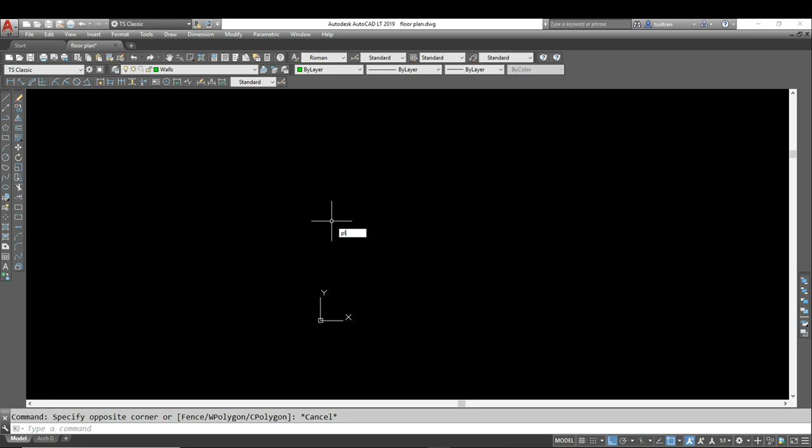Okay, so let's start drawing our walls. What I'm going to do is type PL for polyline. I'm going to select anywhere on the screen and we're going to go 50 feet and down 24 feet, come back 50 feet, and type C for close.

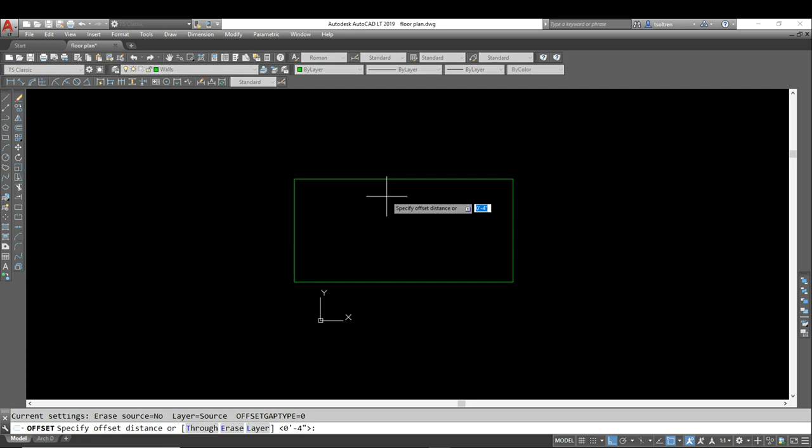Now I'm going to offset 4 inches and offset inside, and then offset again at 5 inches for our brick ledge. So there we have our 5-inch offset.

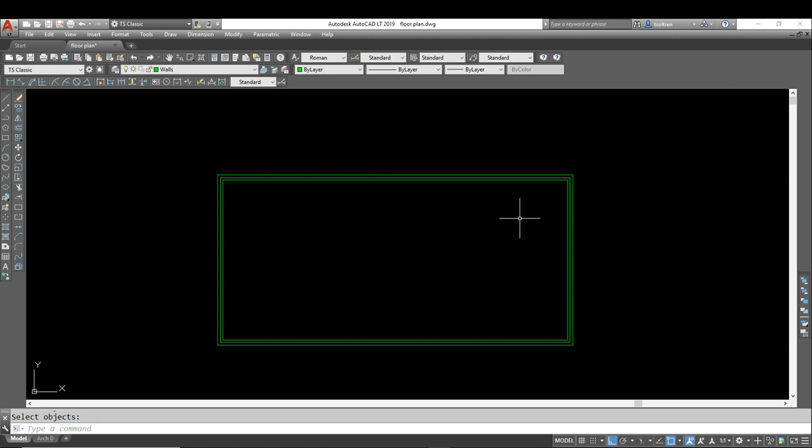And now I'm going to explode the interior line I did here so I can use that to offset my interior walls. So now I'm going to start offsetting my walls, and I'm going to type 14 feet, enter.

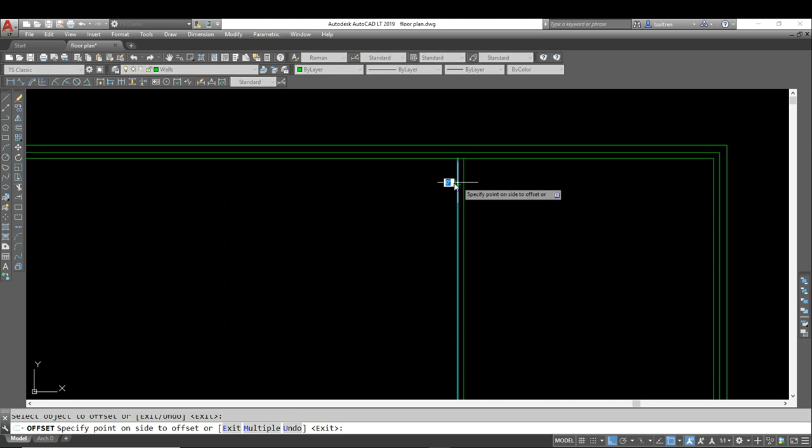And offset 4 inches. Oops, let's try that again. 14 feet. Now I'm going to offset 4 inches. And let's offset this one 5 feet 8 inches. Let's go again, offset 4 inches.

And this one we're going to offset, let's say 4 feet. And let's go 4 inches. Okay, now let's offset again over here on this side. I'm going to offset this 12 feet, offset again 4 inches.

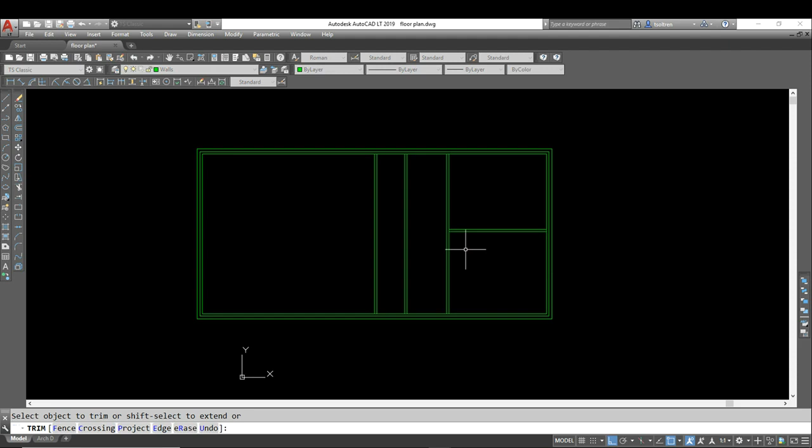And I'm going to use the trim command now, and start trimming that. So these are going to be our 2 bedrooms, and I may slightly adjust that in a minute.

Just trying to get started here, and let's offset this wall 4 inches. Actually, before I do that, let's extend this wall here. I hit EX for extend, selected this wall, right click, and I'm going to select those 2 to extend it over there.

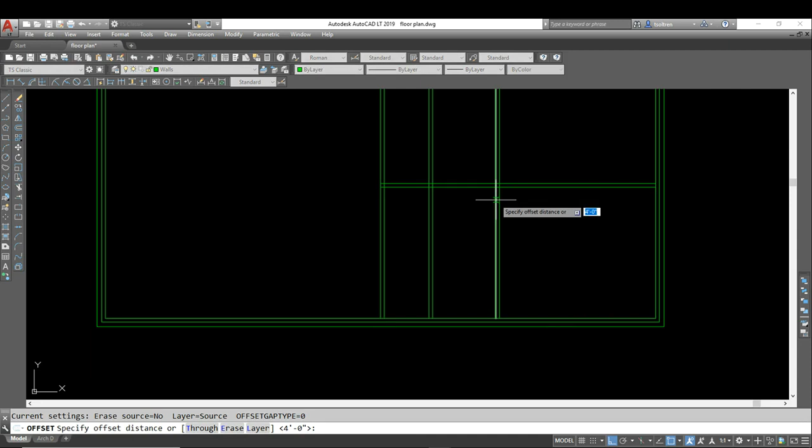And I'm going to offset for a hallway 3 feet 6 inches over here, and let's hit offset 4 inches. And now let's trim some of this out.

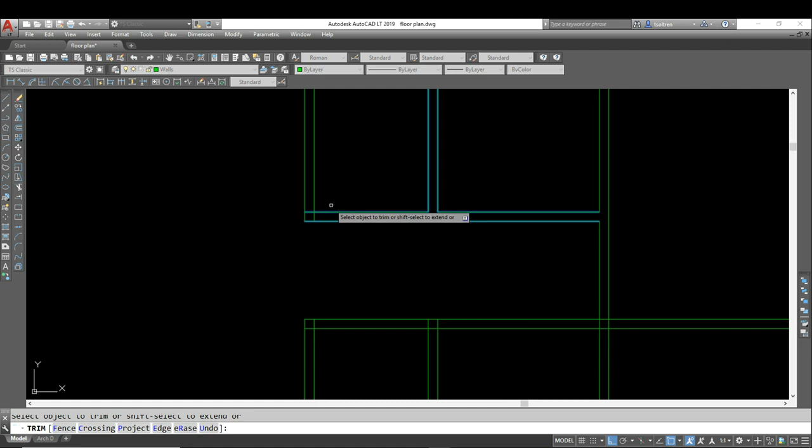Okay, and let's clean it up a little bit more. I may adjust this a little bit more in the future, but let's keep moving forward.

And I'm going to go ahead and offset this 3 feet 6 over here. Oops, sorry about that.

Actually, let's see, what I want to do is create a closet here, so we're going to go 6 feet off this wall. Let's go offset 4 inches.

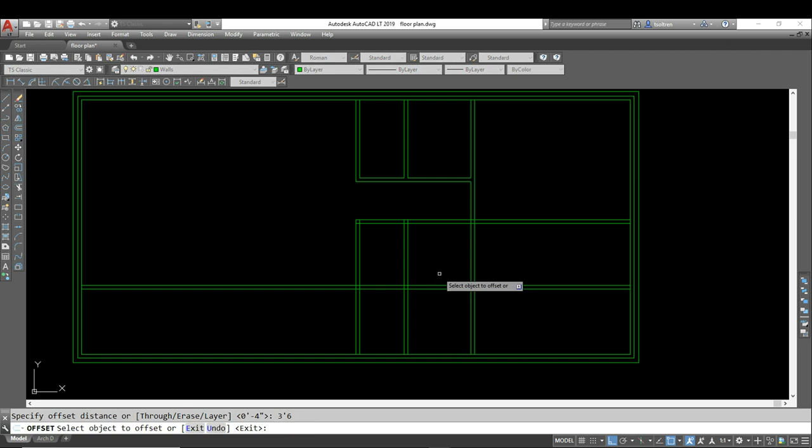Actually I don't want this to be this wide, so let's go 3 feet 6 here, and I'm going to get rid of these. Offset 4 inches, offset 5 feet, because this is going to be a bath area, and let's offset 4 inches again.

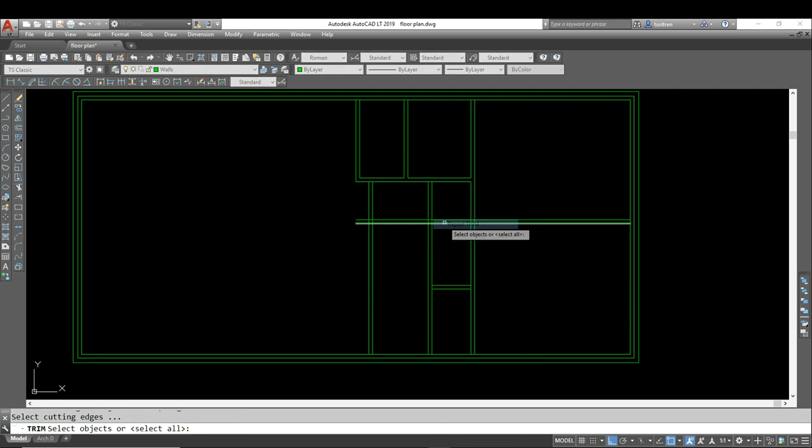Okay, so now I'm going to trim this out there, and let's trim that, and we will trim this as well, and let's go ahead and clean this up.

And I'm actually going to use the fillet command. So fillet, type R for radius, we'll keep it at 0. And what I can do then is just select these 2 lines, hit enter to enter that command again. And there we go. Now I'm going to hit E for erase, extend.

Okay, so what I want to do here is create a doorway for my bathroom. So I'm going to draw a line, offset 4 inches, and for my doors, for standard purposes, I'm just going to do all my doors at 2 feet 8.

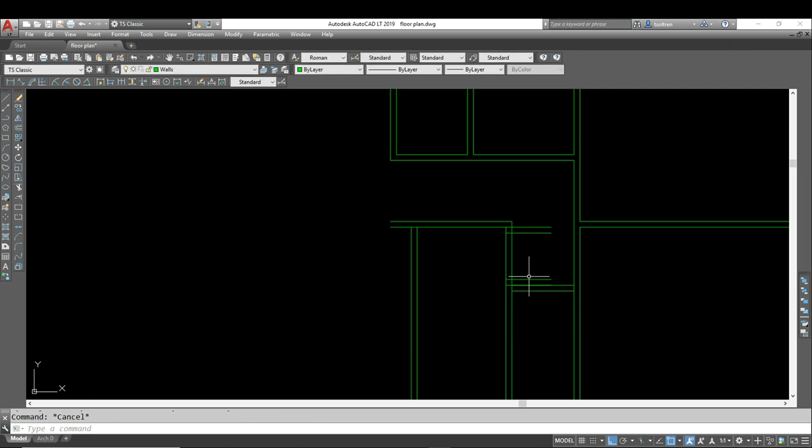And going to offset that, and do an offset at 4 inches again, and I'm going to go ahead and move these 2 walls to that point there, and then create some trim, use the trim command there, and let's extend this to the other side as well.

EX, and this will be the door for my room over here. And let's go ahead and clean those up.

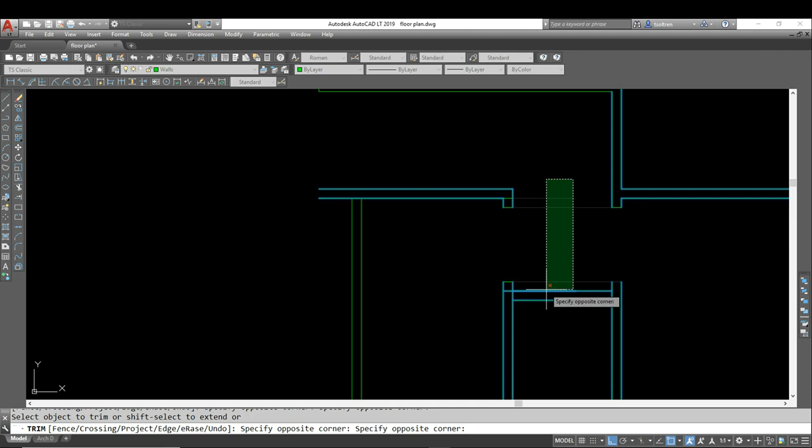Go ahead and erase that, and let's draw that line back. There we go.

Okay, I'm going to draw a line here, and this is going to be the area for my kitchen.

So I'm going to offset 2 feet, which is the standard depth for cabinets, and I'm going to extend my wall out to that point. And I'm going to go ahead and make this line up with that. So I'm going to use the stretch command.

I'm going to select these walls, and there we go, let's erase that. So this is going to start developing into our kitchen. This will be our bath, this will be our closet for this bedroom, and here we have a closet for this bedroom.

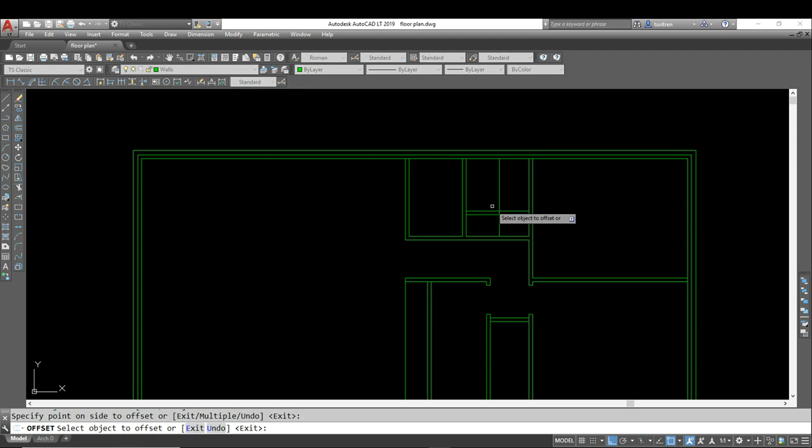I'm also going to create a closet for the hall, which is offset 3 feet, and we'll come back in 2 feet, and I'm going to offset 4 inches. It's going to encroach a little bit into the closet, but that's okay, since it's a pretty big closet anyway.

So this will be a closet, this is a closet for the hallway, and we have a doorway for our bedroom. And this is also going to be a door. What I'm going to do to center that door is just draw a line here.

And I'm going to draw a line there, and we're going to offset 1 foot 4 in each direction, so that will equal 2 feet 8. Oops, and I want to extend. Oh, see if I could do that. There we go, okay, trim. And let's erase that, okay.

All right, so let's continue on to lay out our kitchen. Here I'm going to do a refrigerator, oven, and the sink, so it's kind of going to be a U-shaped kitchen.

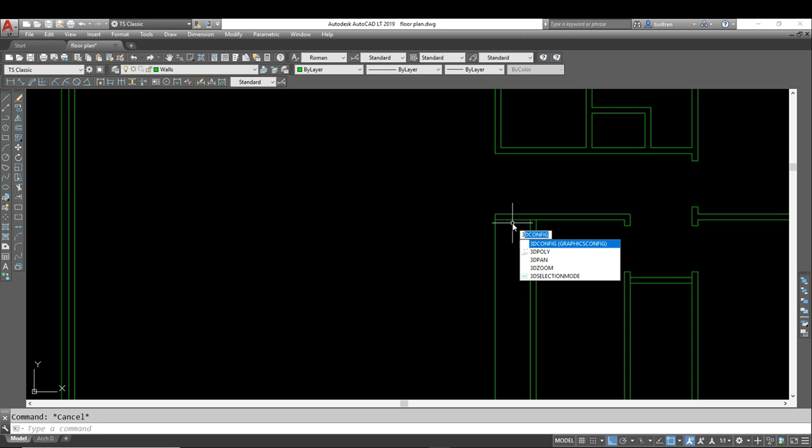For a refrigerator, we want a minimum of 36 inches, which is 3 feet, but we want to give it a little bit more space than that, so it's not completely tight at 3 feet. So I'm going to go 3 feet 2 inches for my refrigerator space, and I'm going to go ahead and trim that out.

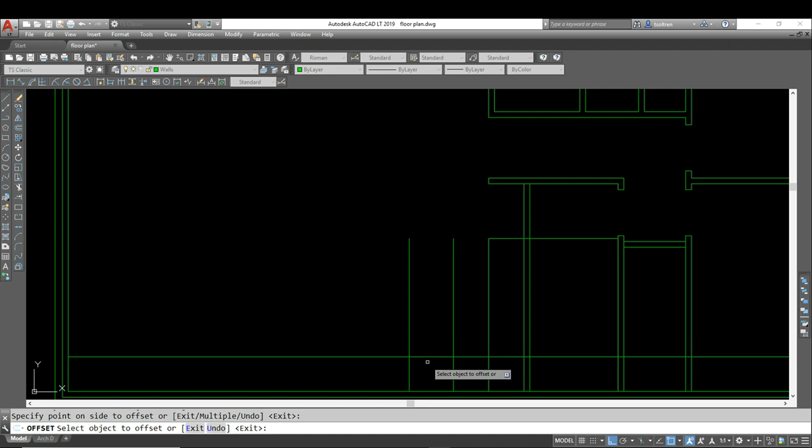And then this will begin my cabinets here. I'm going to offset 2 feet for my cabinets on this wall, and offset 2 feet 6, giving myself 30 inches for my range. We'll offset 2 feet again, and this will be where our kitchen begins to come around this way.

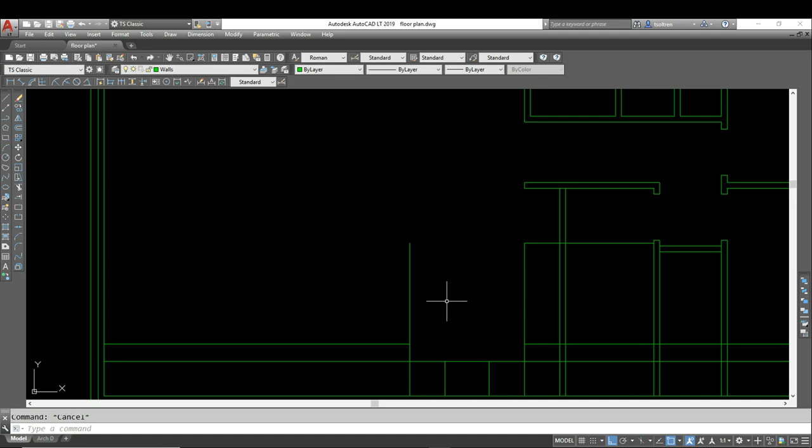I'm going to offset 3 feet, and let's go ahead and do a little trimming. Okay, and then offset 3 feet for our sink and 2 feet for a dishwasher. I'm going to go 2 feet this way, and we'll go ahead and close that up. So let's use trim again. Okay, let's trim some of this as well.

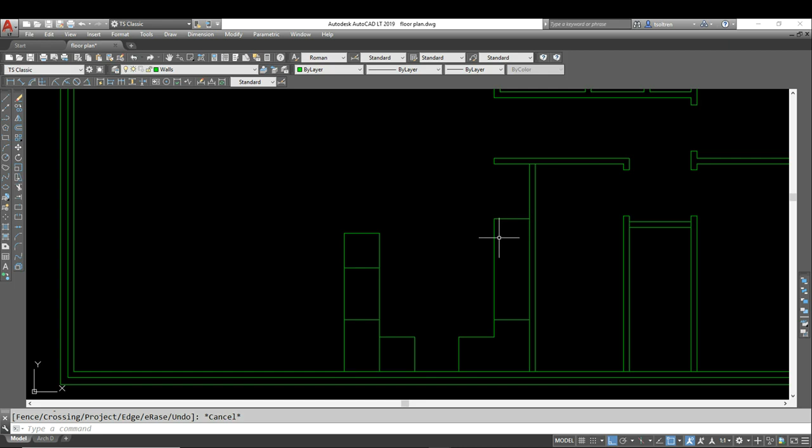So for cabinets, you want to do 3-inch increments as the standard. Usually they start about 9 to 12 inches, and then you could usually increase your increments by 3 from there.

So what I have here is a 30-inch range, 36-inch sink, dishwasher, refrigerator. Those are basically the main components of a kitchen, and then we will have an extended bar area over here, and I probably will add another 2 feet to this kitchen here.

Let's extend this. Oops, EX, extend, right click and get that around there. Okay, all right, so basically we're just laying out the basic layout of this home, and we will have an overhang here for this island or peninsula, and this will be our dining area, our family room, and then here I'm going to put a utility room.

So next thing I want to do is let's go ahead and cut out the rest of our doors. So right here I'm going to click there, and let's make our doors 4 foot wide. So I offset 2 feet each way, trim, and let's delete that.

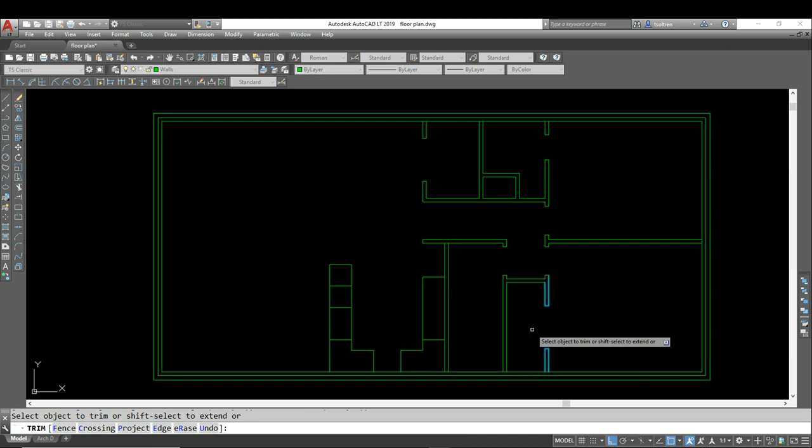And I'm going to go ahead and offset 2 feet for our closet here, giving this one a little bit of a bigger door since it's a bigger closet. And let's trim. Let's go ahead and select everything here, and we'll just trim our walls all around.

Okay, so that's pretty much the walls of our house. So now the next thing we will do is add some windows.